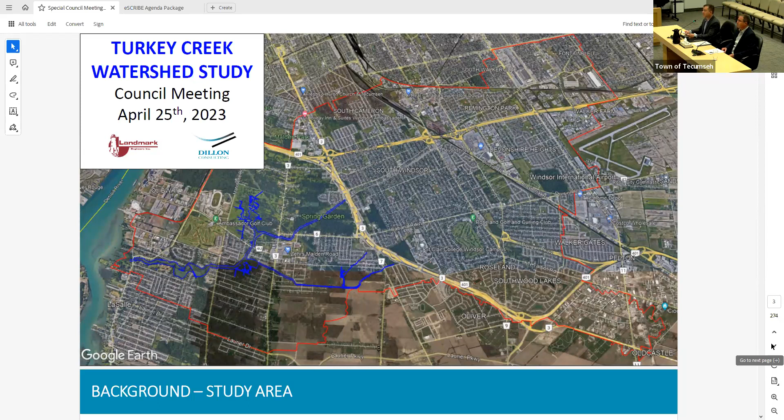So the study area, the Turkey Creek watershed is approximately 64 square kilometers with contributing flows from town of Tecumseh, city of Windsor, and town of LaSalle. Drainage from Tecumseh's Oldcastle area ultimately reaches the Detroit River via the Wolfe Drain, the Cahill Drain, and Turkey Creek. Next slide, please.

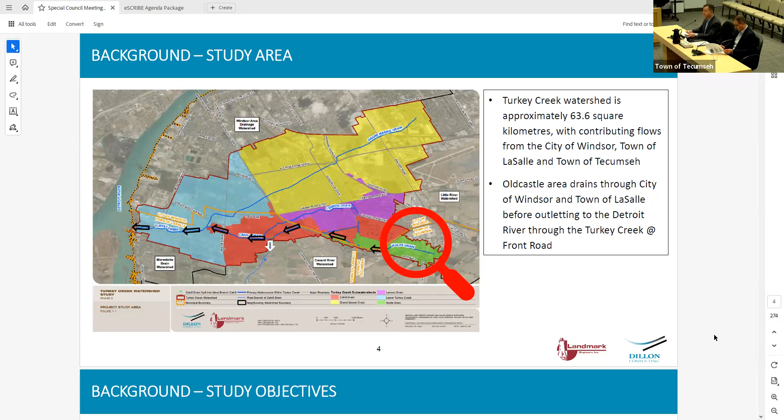The primary objectives of the study included updating the regulatory 1 in 100 year flood levels and flows, and to develop a hydrologic and hydraulic model for use in assessing stormwater impacts of proposed projects in future studies. The secondary study objectives included quantifying the spill from the Cahill Drain into the Howard Bouffard planning area, assessing impacts of future developments, and to identify and assess opportunities to mitigate future flood risk. And now I'll turn over to Alan.

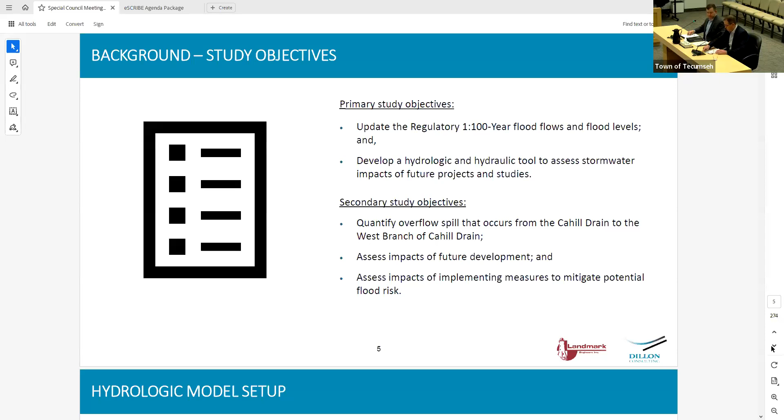Good evening. Next slide, please. So this is a snapshot of the hydrologic model that we compiled for the project. So it's a detailed watershed model. It was calibrated to that Grand Marais gauge that Mark alluded to. There's a lot of detail in that model. There's catchments where we've got the main drains, we've got storm sewer networks, we've got a lot of subcatchments, a lot of parameters in the background. What that model is doing, it's measuring flow. It's measuring how much rainfall becomes runoff. Next slide.

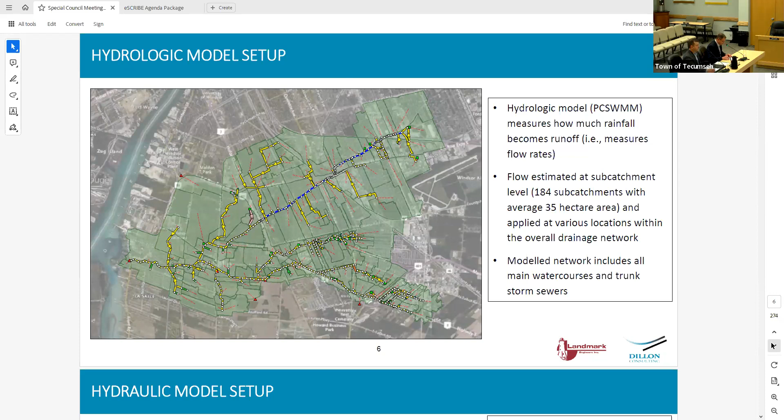So we also had a hydraulic model, and that hydraulic model setup is what you see in the snapshot right from the model environment. So that model conveys flows through main drains and bridges from the Herb Gray Parkway to the Detroit River through Turkey Creek, Cahill Drain. And what you're seeing there is a 2D adaptive mesh. And so that mesh is capturing the existing surface. When we use the term adaptive, it's higher resolution, capturing the details of the drain, and it's larger mesh in the flatter terrain. That model is measuring levels. So the two models combined, one measuring flows, then those flows are put into the hydraulic model to measure levels. Next slide.

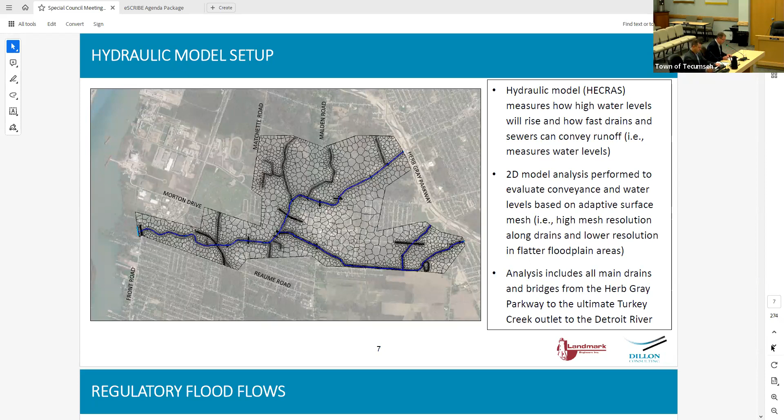So this slide here, we're showing regulatory flood flows. And just to define the term regulatory, it's the 100-year flows and levels that are regulated by ERCA. And as Mark had alluded to, the regulatory 1982 were the current levels until this study, which are now intended to be the new levels, or the new regulatory levels.

So this table here, there's a lot of numbers. The takeaway, it compares the 100-year, the regulatory 1982 to the 2022. This table is right out of the report. A couple key things to focus in on where we've got the magnifying glass. There were some substantial increases to the Grand Marais Drain and the Turkey Creek in the order of 65, 72%. So some significant increases, and that was primarily due to the corrected level gauge on the Grand Marais Drain.

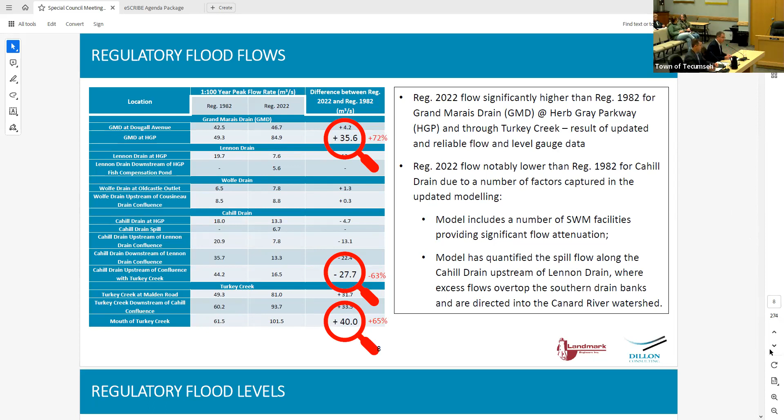We also note there's a decrease to the Cahill Drain flows, and that's in the order of 63%, plus or minus. And that's primarily due to the stormwater ponds with the parkway within the Lennon Cahill sub-watersheds, as well as the Cahill spill that was quantified and that actually removes water from the Turkey Creek watershed. The Cahill spill, then some of that flow and volume goes southerly and towards the Canard watershed. Next slide.

Again, a lot more numbers here. The key takeaways is we're looking at regulatory flood levels here, where again, we're comparing the old regulatory 1982 to the 2022. And again, to note, you've got some reductions in the Cahill levels, which is not surprising. We've got lower flows. We've also accounted for the drain improvements that were done in the mid-90s on the Cahill drain.

Also of note, we've got some marginal increase on Turkey Creek. That one is a bit counterintuitive at first glance. Again, we talked about much higher flows through the Grand Marais drain and especially through Turkey Creek. But what we found is those were significantly offset by the improvements that were also done in the 1990s. And so what we end up with is a marginal increase. You got a lot of red numbers there. They're all in that 0.1, 0.22 meters, which is 0.22 meters would be the size of a standard soccer ball, to put that into perspective.

So what we found with that increase is that it's a very nominal increase on the extents, and it has no increase in flood risk. So as Mark said, good news story. Next slide.

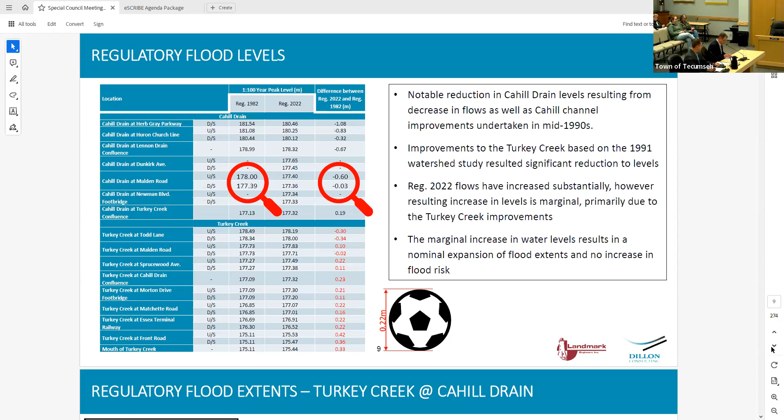Here we've got regulatory flood extents at Turkey Creek and Cahill as an example. So we're showing the 100-year flood extents. That's the yellow hatch that you're seeing. We're showing the regulatory 2022, the new floodway limits. That's the blue line. And we're also showing how that includes the flood fringe areas, which is the hatched. And we'll come back to that area on a few upcoming slides as well. So we're showing you the flood extents, the floodway, and that section there that it's a two-zone concept. We're showing you the main floodway as well as the flood fringe.

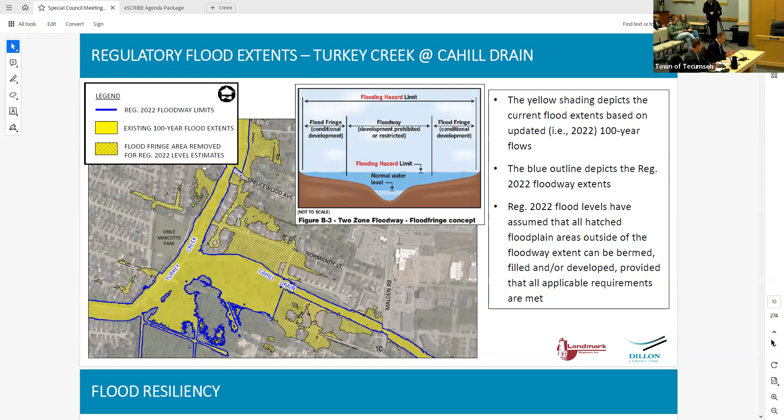And the importance of that is that you've got the flood fringe, some of those areas of the flood fringe can be removed. There's a corresponding level increase. And there's conditional development that's allowed within that flood fringe. And those levels with that smaller contained floodway limit have been accounted for. Next slide.

We also did, as a resiliency, a what-if scenario. What if that core had hit other parts of the watershed? And what we determined out of that is the most critical occurrence was if there was more flow in the Lennon Cahill areas, and that would result in more spill at that Cahill spill and a negligible impact for everything downstream through LaSalle and onwards to Turkey Creek. Next slide.

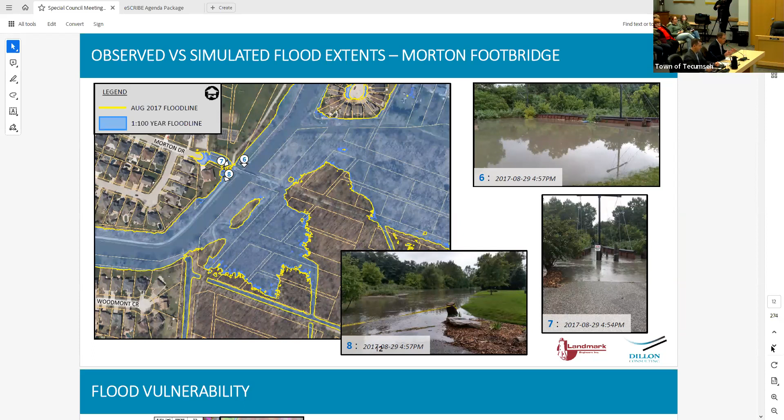So through the report, when we looked at flood vulnerability, we determined there were a few areas that were more vulnerable. The flood extents encroach onto dwellings along Normandy Street. Again, that's that same area that we've been zooming in on with some of the other slides. It is important to note those homes were constructed prior to 1982. In other words, they didn't have that floodproofing standard. They were flood prone before 1982, and they're still more vulnerable.

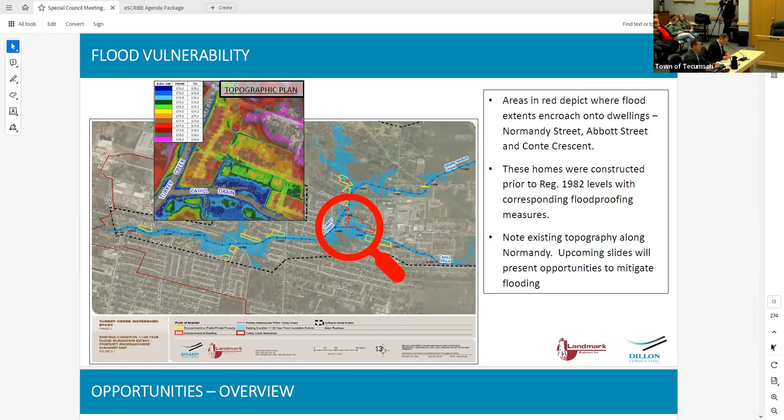And if we zoom in on the topographic plan, a lot of colors, again, that's a heat map. It's showing a very low topography there. And a few of the next slides will discuss some mitigation measures for that particular area. Next slide.

So this slide here is just showing an overview of some of the opportunities that we looked at to improve upon the existing conditions. So we had some improvements to the lower Turkey Creek channel, number one on the plan, improvements to the ETR bridge. We had construct dikes along private properties. That's area number 3. That's the area we've zoomed in on in a few of these preceding slides.

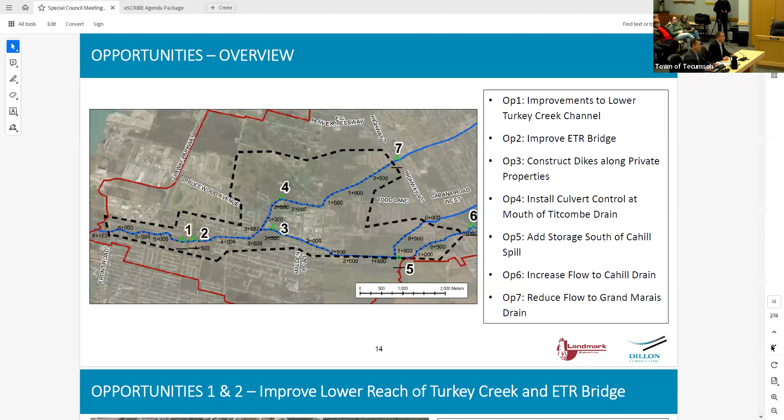Option 4, we looked at some controls on the Titcombe drain. Option 5, we looked at adding storage at the Cahill spill to attenuate, dampen some of those flows that are spilling south towards the Canard watershed. Option 6 and 7, we were looking at increasing flows to the Cahill and reducing flows to Grand Marais Drain. So we'll go briefly over each one of those, and spend a bit more time on option 3. So next slide.

So here options 1 and 2 are combined. This is a Google Earth image. It really shows and depicts the Phragmites overgrowth that's been happening in the lower reach of Turkey Creek. And so option 1, we've got to clean and remove the Phragmites to double the open channel width, approximately 1,700 meters of length of channel.

Option 2, we looked at doubling the ETR bridge flow areas, a significant reduction in head loss across the bridge if we do so. And if we combine 1 and 2, it was reducing levels below the regulatory 1982. However, not much mitigation of flood risk over the watershed and specifically at that vulnerable area that we zoomed in on on Normandy Street. Next slide.

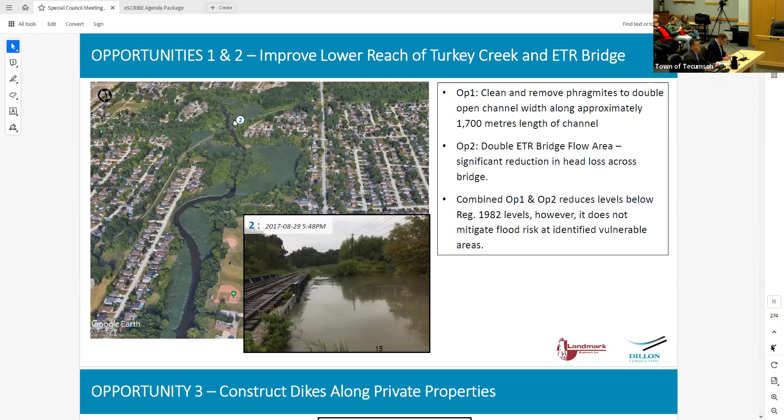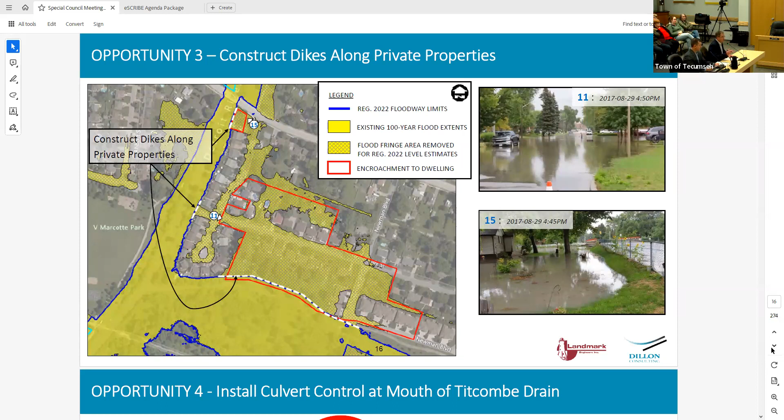So again, back to that area on Normandy Street with the flood fringe area, and what we're showing here is constructing some dikes along that private property to enclose that area would provide some significant flood risk mitigation. Next slide.

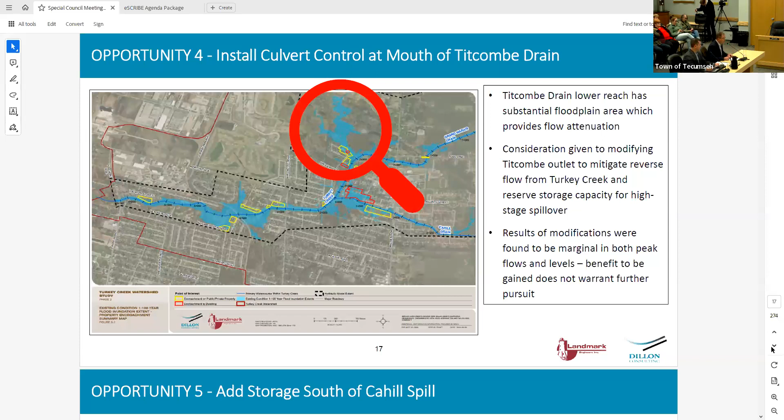This one I'll touch on very briefly. We are looking at some of the hydrodynamics with the system and potentially putting some controls there to utilize the storage in that low-lying floodplain area when you really need it, when the levels are high in the drain. What we found through the modeling is it didn't really have much benefit. Next slide.

And the benefit of that, attenuating the spill flow, can significantly reduce the sizing of the infrastructure required for the Howard Bouffard development. And this opportunity was to be further explored through the ongoing Howard Bouffard master drainage study. Next slide.

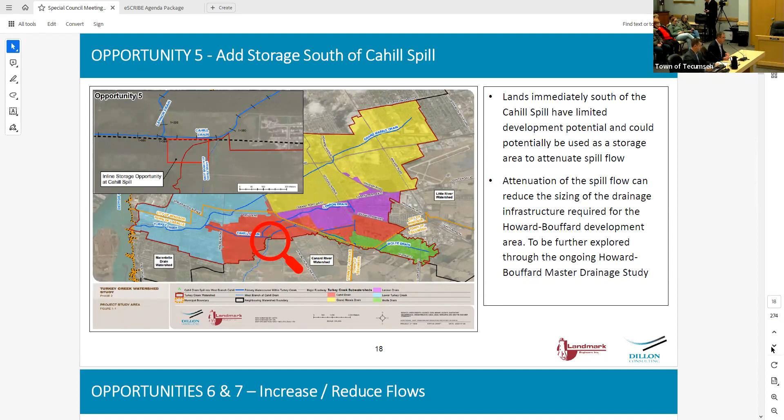This is where we looked at option 6. We looked at increasing flow to Cahill drain. So option 6 was the Herb Gray. What we found through the study was that there's some additional capacity in the infrastructure through the Herb Gray Parkway leading into LaSalle into the Cahill drain. And so we identified a potential opportunity to increase flows primarily from the Oldcastle area or from the Southwood Lakes areas.

Then option 7, we considered that the Windsor Sewer Master Plan has recommended improvements that will ultimately reduce flows in the Grand Marais drain. However, that timeline is expected to be over 20 years, and so it wasn't considered for the current study. Next slide.

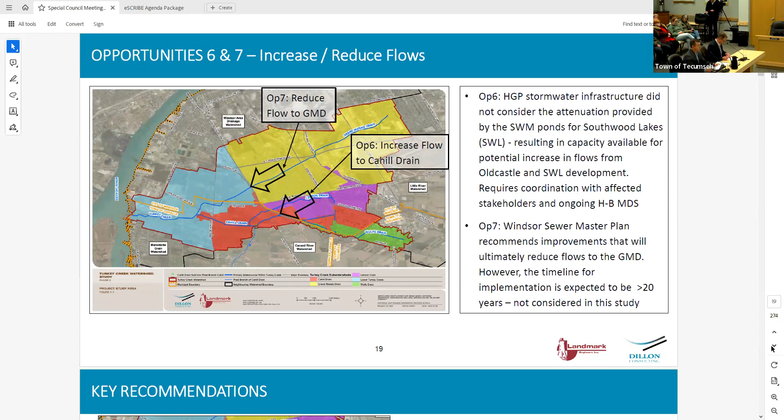So the key recommendations that came out of the study was that the study results should be used as the new regulatory flows and levels. In other words, the regulatory 2022.

We recommended to perform routine maintenance along the main channel banks of the drains, remove brush and trees with relatively minor effort and cost. So we see on the left there is an image of an example of Cahill drain maintenance that was done. October 2017, you see the drain with a lot of larger, more mature trees, and now you see it in June 2020 in that image with a clean drain.

And so that was an important recommendation to keep up that routine maintenance. And when it's done routinely, you're dealing with much smaller, easier to remove small tree branches and brush and so forth. We also recommended to assess the Phragmites growth and the need for a maintenance program to ensure that it doesn't encroach and become any more narrow than it currently is.

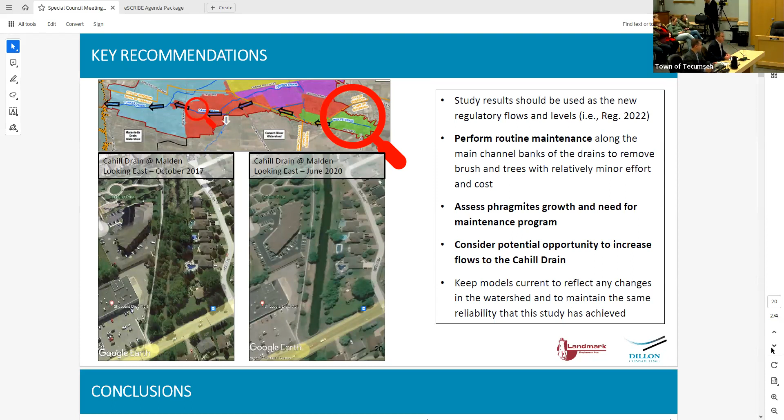Again, recommended to consider that potential opportunity to increase flows to the Cahill drain, as we talked about in the previous slides. And we recommended to keep the model current to reflect any change in the watershed and to maintain the same reliability that this study has achieved. Next slide.

So in conclusion, we have the change in the 100-year peak flows and levels compared to the regulatory 1982. As we said, there were substantial increases in flows on Turkey and some reductions on Cahill. And we saw those noticeable decreases in levels on the Cahill and then only saw the marginal increases with no flood impacts on the Turkey.

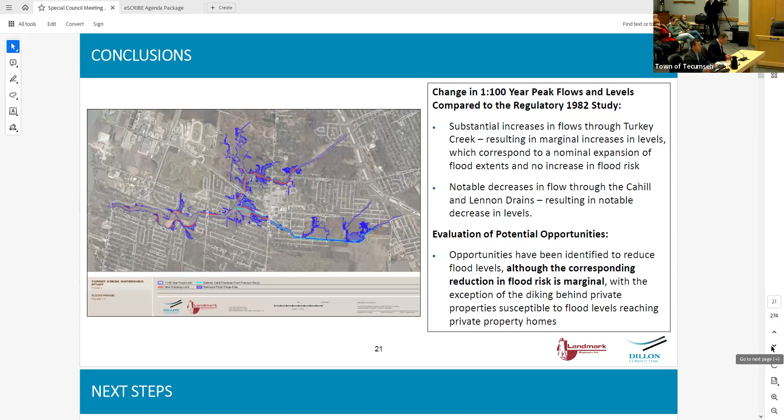And then evaluation of potential opportunities. These opportunities have been identified to reduce flood levels, although the corresponding reduction in flood risk is marginal, with the exception of the diking behind the private properties susceptible to flood levels reaching the private property homes. So with that, I'll pass it to Mark for next slide.

So in terms of next steps, this study will now serve as a tool to assess the potential stormwater impacts for proposed projects and studies for years to come. It further serves as a tool when assessing costs related to proposed implementation of any such projects or studies.

Moving forward for the town of LaSalle, as Alan mentioned, there's a significant opportunity related to protecting some of the flood-prone properties identified in Opportunity 3, as well as a future consideration of the cost benefit for the improvements to the lower Turkey Creek, as well as the Essex Terminal Railway Bridge identified in Opportunities 1 and 2.

The City of Windsor can move forward and consider the implementation of Opportunity number 6. And the town of Tecumseh can consider the cost benefit of increasing flows from the Oldcastle Hamlet. We're happy to take any questions if there are any.

All right, thank you very much, gentlemen, for the presentation. Any questions or comments? Yes, go ahead, Councillor Houston. Thank you, Worship. And through you, the only question I have is any of the options in improvements to the watershed, are those all done specifically through the Drainage Act and in the Drainage Act process, or does it follow some sort of a different process for those specific improvements to happen?